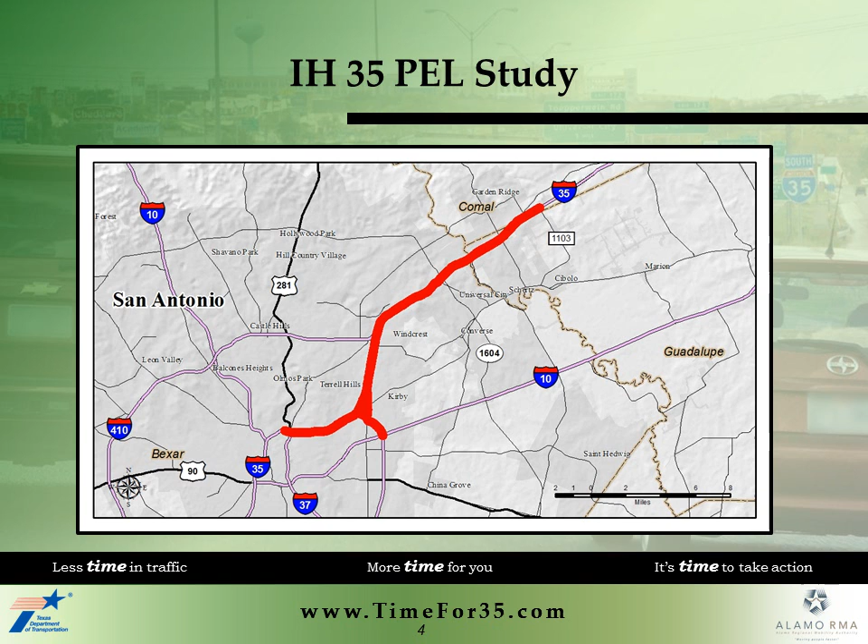The goal of the PEL study is to help plan for long-term transportation improvements on IH-35. The study will engage stakeholders early and often throughout the planning process, identify the transportation needs and issues within the study area, identify potential solutions called alternative concepts to meet the identified needs and evaluate them for their potential impacts, and recommend viable transportation alternative concepts that can be carried forward into future, more specific environmental studies.

Previous planning studies, such as the Northeast IH-35 Corridor 1996 Major Investment Study, the My-35 Plan, and the San Antonio-Bexar County MPO Mobility 2035 Plan, have identified a need for transportation improvements along this vital corridor, but have not been advanced to the environmental study process for further development.

We believe it's time to finally address these needs. A PEL study provides a tool for re-engaging the public and agencies in developing improvements for this section of the IH-35 corridor, creates a link between past, current, and future transportation decisions for this area, thus potentially minimizing any duplication of effort and time lost between studies, and potentially shortens the time needed to implement a project by allowing planning-level decisions to be carried into future, more detailed environmental studies.

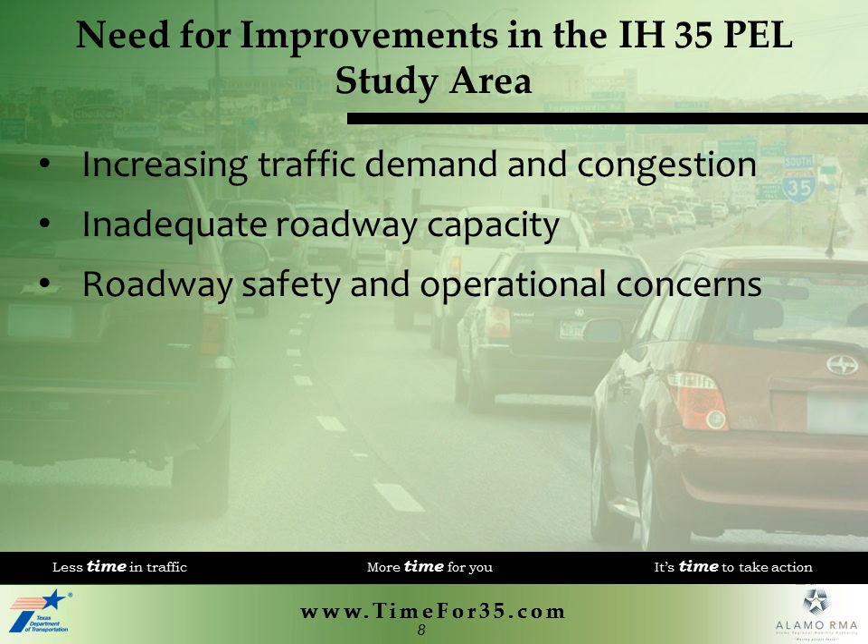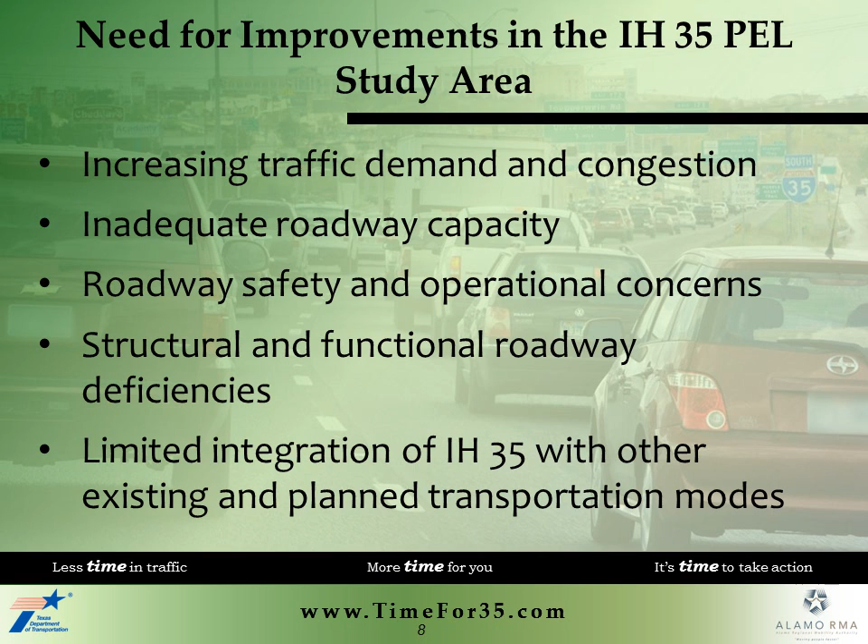So far, based on technical analysis and agency and public input, the need for improvements in the IH-35 PEL study area is primarily to address increasing traffic demand and congestion, inadequate roadway capacity, roadway safety and operational concerns, structural and functional roadway deficiencies, and limited integration of IH-35 with other existing and planned transportation modes.

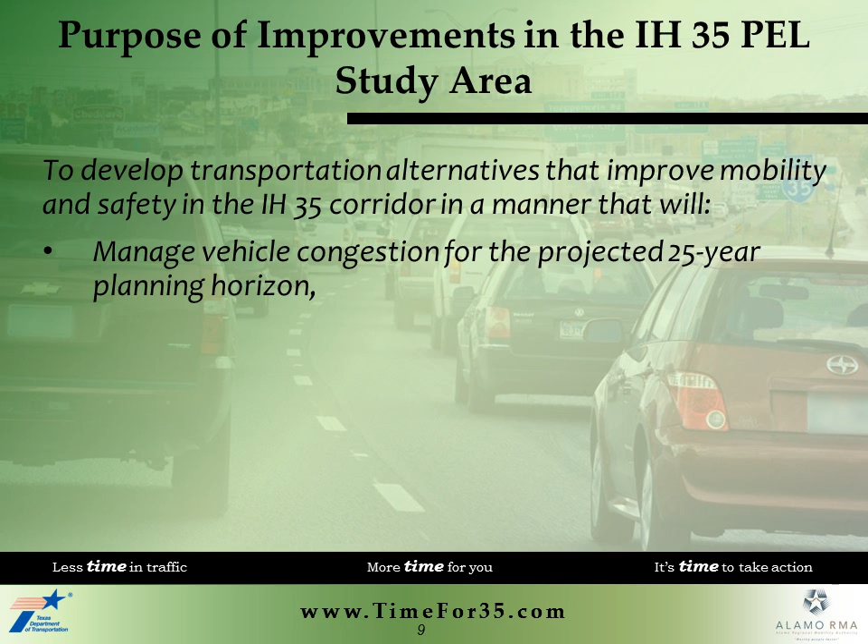Based on the needs identified in the study area, the purpose of the IH-35 PEL study is to develop transportation alternatives that improve mobility and safety in the IH-35 corridor in a manner that will manage vehicle congestion for the projected 25-year planning horizon, promote efficient use of existing transportation facilities, minimize impacts to the natural and built environment, and complement other modes of transportation and economic development initiatives in the region.

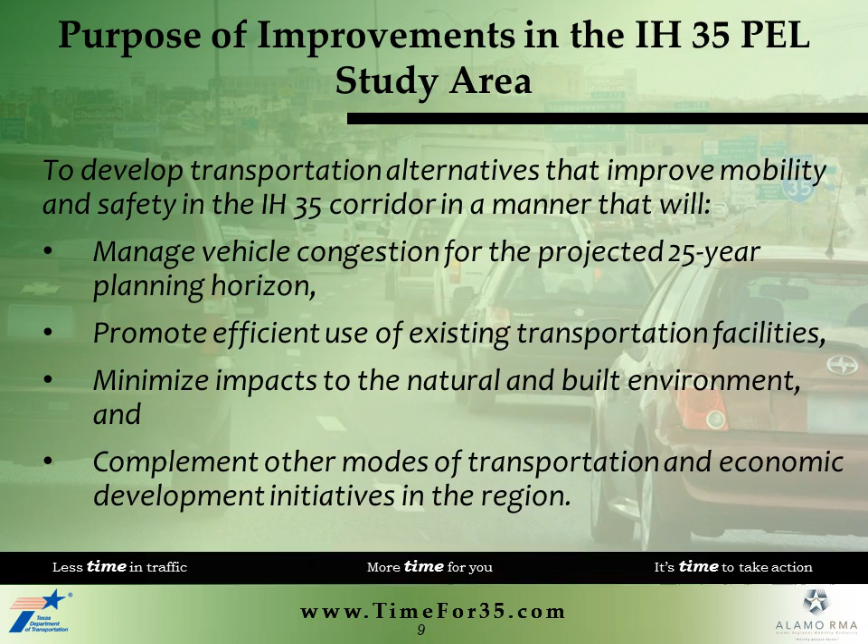First, a universe of alternative concepts was developed based on previous studies, technical analysis, and input received from the Technical Advisory Committee, Community Advisory Committee, and the public. These alternative concepts included expansion of the existing IH35 facility, construction of a new highway, expansion of parallel roadways, implementation

of rail, transit, and truck improvements, and operational and demand management strategies. Next, a high-level qualitative analysis of the universe of alternative concepts was conducted to determine which concepts, on their own merit, could potentially meet the need and purpose of the IH35 PEL study. If an alternative concept was determined to not meet the need and purpose, then it was recommended for elimination from future consideration as a standalone alternative.

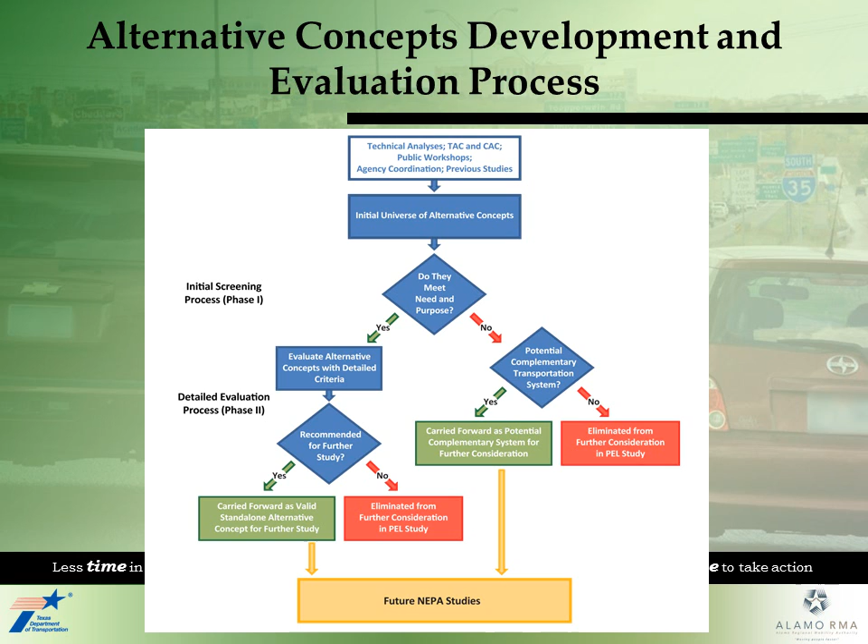built and natural environment. Today, we will be presenting the results of the Phase 2 analysis and the recommendations for which standalone alternative concepts should be carried forward into a National Environmental Policy Act, or NEPA for short, study for a more detailed analysis.

Based on the analysis conducted during the alternative evaluation process, it was determined that adding highway capacity to the existing IH35 facility would be the relatively most successful approach to meeting the need and purpose of the study and to addressing the long-term mobility needs in the corridor while minimizing the potential for impacts to the built and natural environment.

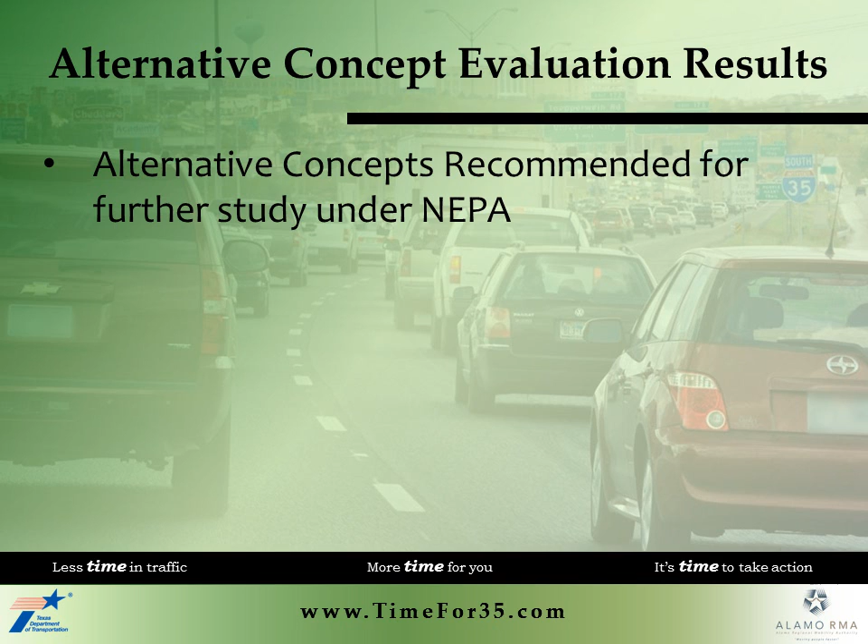Therefore, this alternative concept is being recommended for further environmental study along with the no-build alternative, which is a required baseline condition for consideration in all NEPA studies.

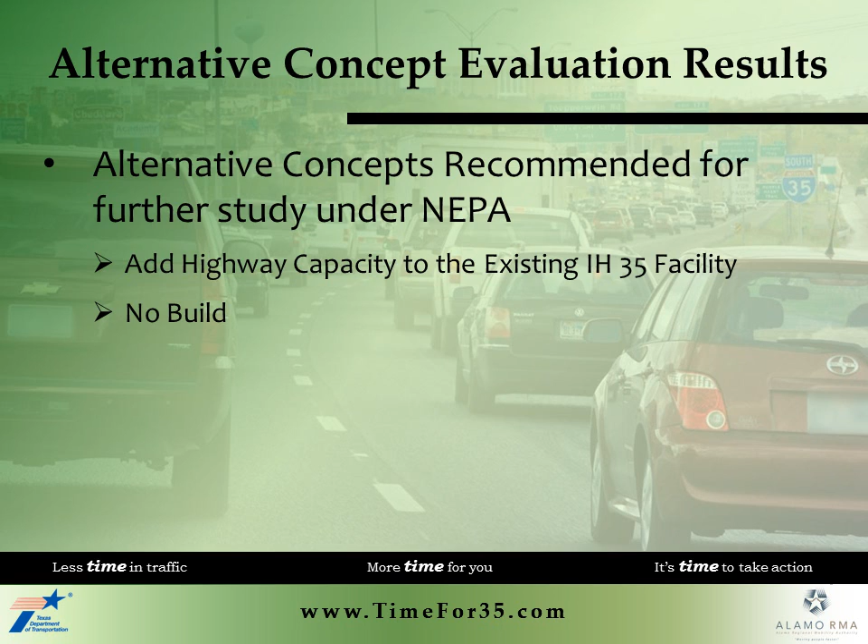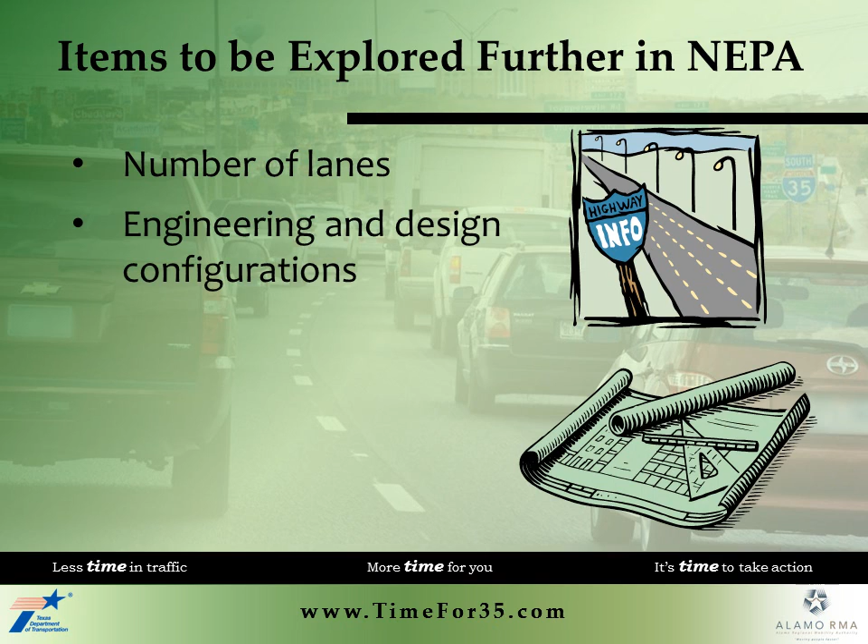Once a recommendation is carried into a NEPA study, there are many project-specific elements that must be explored further, including the number of additional lanes to add to IH-35, specific engineering approaches and design configurations, project financing considerations, and project-specific impacts associated with adding lanes to IH-35.

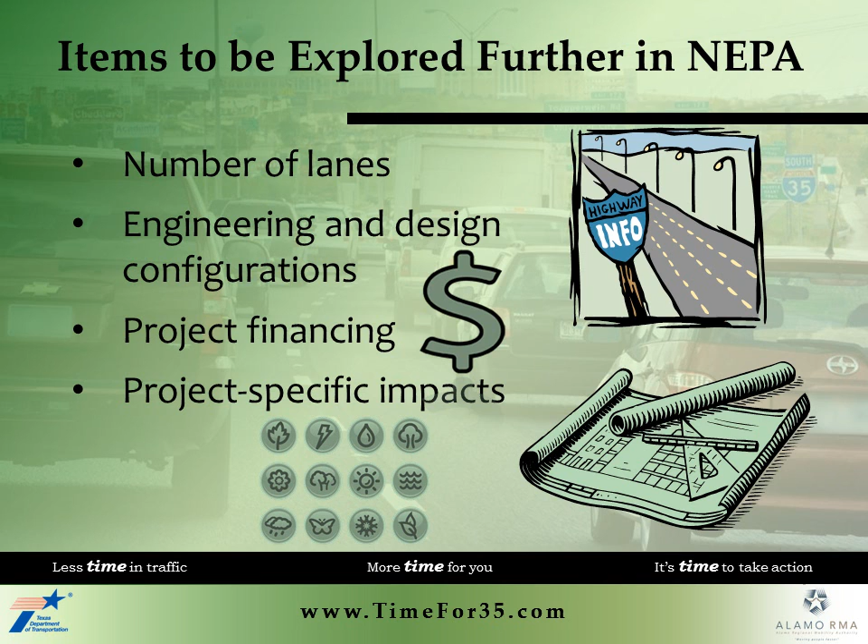Now that we have discussed the results of the alternative concept evaluation process, it's time to turn to the results of the overall IH-35 PEL study.

At the beginning of the IH-35 PEL study, we noted that the intent of such a study was to create a link between the planning process and the environmental study process. We believe we have accomplished this over the last year with the following results that can feed directly into a NEPA study. We have identified a need and purpose and have defined the overall affected environment in the study area.

We have recommended 2 alternatives for further study in NEPA, including added highway capacity to the existing IH-35 facility and the no-build alternative, which is a required baseline condition considered in all environmental studies.

Additionally, we have eliminated 6 concepts from further study as standalone solutions in NEPA, including an operational and demand management only concept, a rail only concept, a transit only concept, a truck lanes only concept, a new location highway facility concept, and a concept involving expansion of a parallel roadway.

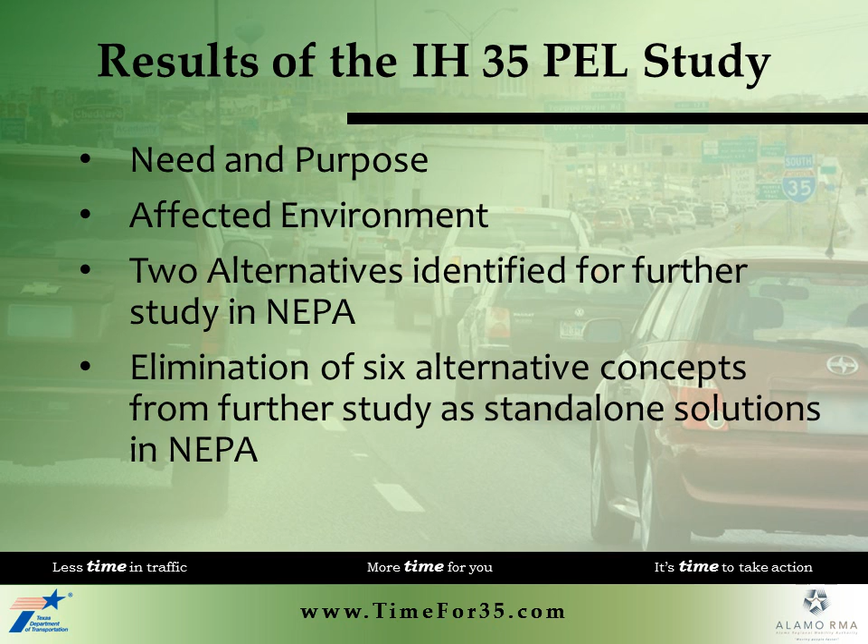Although the operational and demand management only, rail only, and transit-only alternative concepts have been eliminated as standalone concepts in this process, they have been identified as potential complementary transportation systems and will also be explored further in NEPA.

Finally, the IH-35 PEL study has allowed us to re-engage the public and agencies in the planning process, which will be extremely important as we move forward into more detailed studies.

After completing this 4th and final round of public meetings and reviewing the comments received, the next steps will be to finalize all of the IH-35 PEL study technical reports and then request a concurrence from the Federal Highway Administration on the results and recommendations made in the study. Then, a formal NEPA environmental study will begin, building off the analysis and results of the IH-35 PEL study.